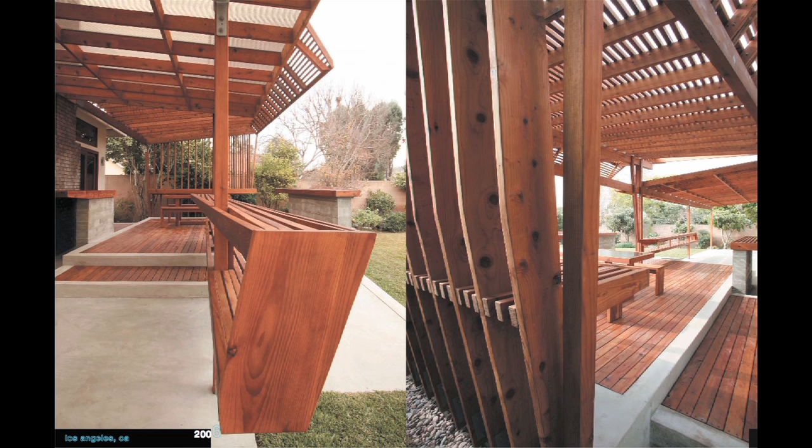And then, of course, the second project is, you always do something for your parents. So the second project is an outdoor deck we did for my parents. This project was the first time we had a couple of SCI-Arc interns over the summer, and we built the thing over the course of the summer and completed it. Which led to this idea that, wow, we can actually make projects happen in a period of 4 months. So ever since, about 5 years ago, every single summer we've embarked on an installation project, sometimes even 2, at the beginning or the end of the summer. And we've had mostly SCI-Arc interns help us in the construction of them.

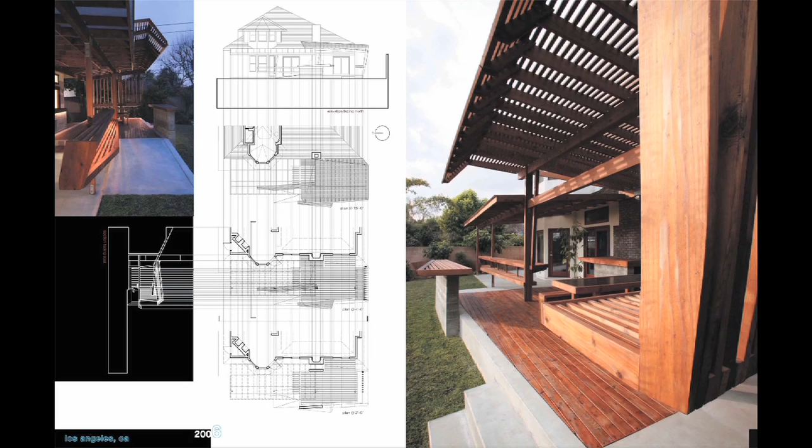So we thought it was important just to show those first couple of projects, to show you how we began in LA. Immediately after this, the work took a pretty dramatic turn, but understanding how the work played out over that period of time seemed important to us.

As Paul mentioned, the idea of line work is something we've been really intensely studying for many years now, and we even went back and pulled out a couple of our own projects for the lecture. A work of mine from about '94 on the right, Jenny's thesis from the GSD on the left. Jenny had always been interested in ideas of line related to infrastructure and program. And so her thesis had to do with an idea of wrapping program around these infrastructural pieces and the kind of spatial and organizational implications of that.

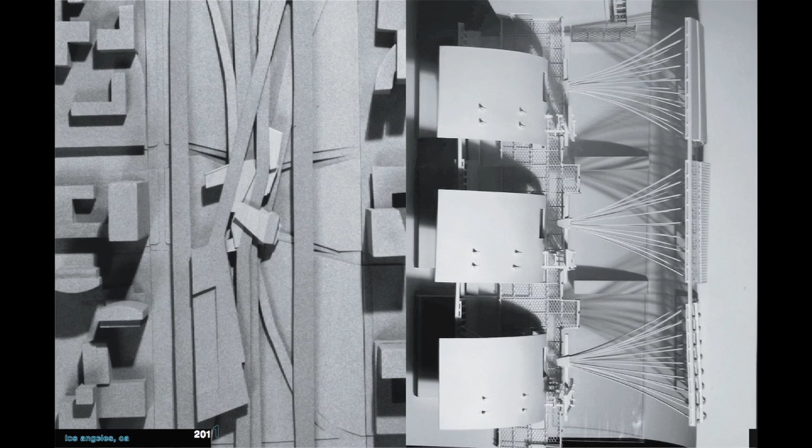My project on the right was about the interplay of light on these complex structural elements and immersing yourself into that space. The type of line that we're interested in has never been a graphic idea. If you look back at both of those, these seem like relatively two-dimensional pieces, but when you get down into them, it was really about creating spaces that could be experienced and, as I said, that you could be immersed into.

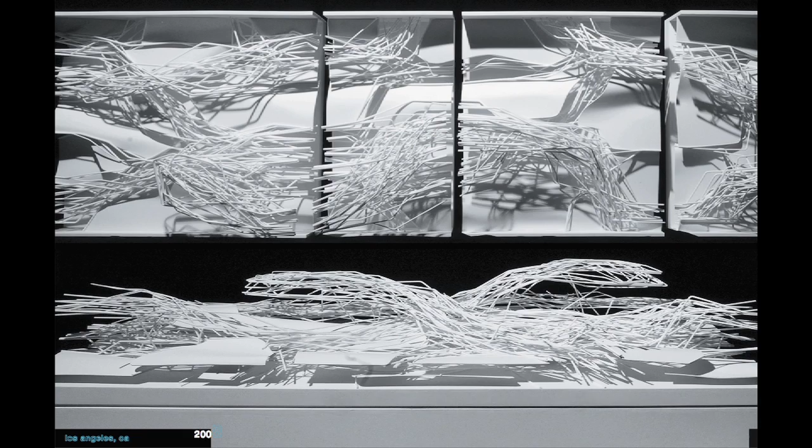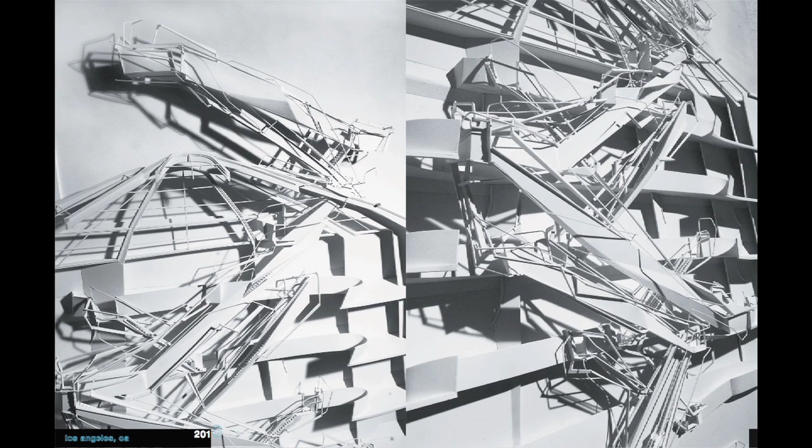We've always been interested in very dense buildup of lines, and in particular the idea that this kind of buildup had the ability to create nuanced spatial enclosure, so that while experiencing it, your experience oscillates between something that forms enclosure, immediately in front of you, and something that in an instant flows back into spaces or multiple spaces. This is a project we did for the Guggenheim, for the show Contemplating the Void. They had actually asked us to do a two-dimensional drawing, and so we decided to give them a 2-inch two-dimensional model.

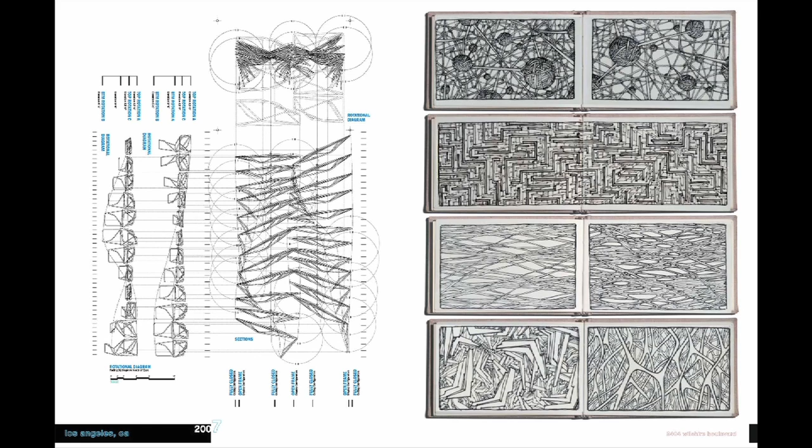The types of drawings that we've done over the years have also dealt with this idea of lines in a couple of different types of studies. On the right, sketches done over long periods of time related to no particular project, but really meant as a way of expanding spatial comprehension in the drawing. We've found that the more these have been produced, the more we could predict how to draw them better. The earlier ones were relatively simple, and now I'm able to further anticipate what will happen in the drawing compared to previous years. The drawings on the left are meant to capture the technical aspects of the projects, but also to convey a sense of the spirit, in this case, a project that moved, which we'll go into a bit later.

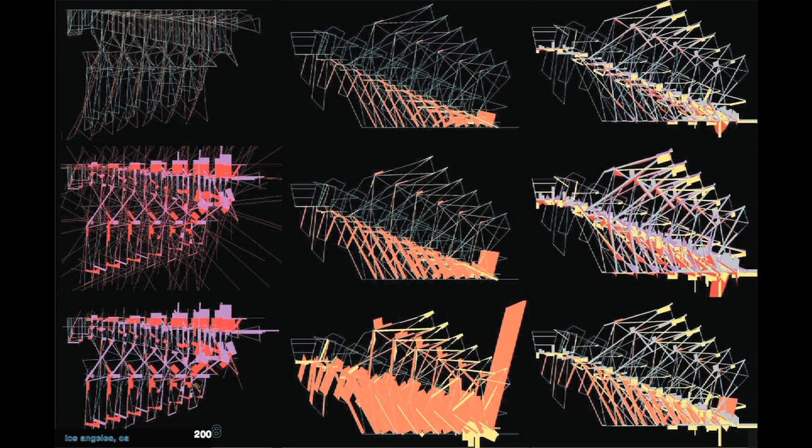We've always been interested in line work as a structural element, in particular because we have always believed that part of what enriched the experience is the idea that you could prolong the experience by creating work that you encounter without completely understanding it. It's never understood as an instant gesture, but it takes time to understand. On one hand, you know that it's doing something structurally, but it's a relatively inefficient system. The goal has never been to do it from an engineering standpoint, but to create something that's clearly working, but forces you to engage it in order to understand how it works. So you have to trace lines across space, understand their connectivity, and we believe that's enriched the experience.

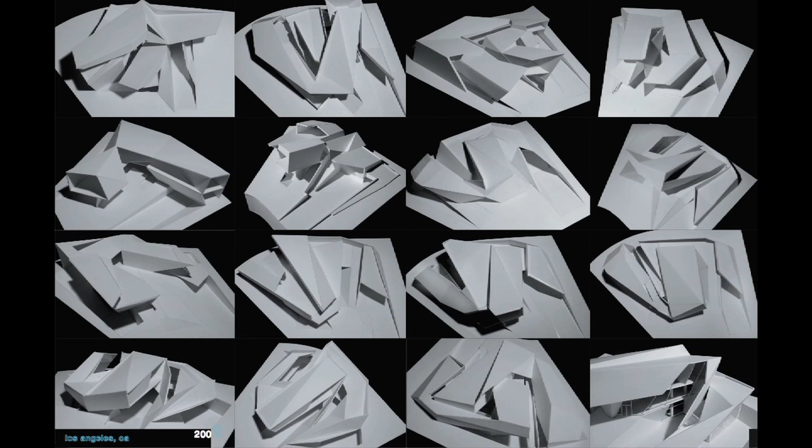So, one, we build tons and tons of models. We average in the 20s for each project. This is a structural model we did for the Muhammad Ali project, which we will talk about later. And then we also work digitally. While the physical model was great for understanding gravity and even structurally how it would work and operate, the digital model gives us the computational power to create the type of variations we can't do in the physical model, and also the precision we couldn't get either. And so with this, we were able to really create variations on something with very slight parameters.

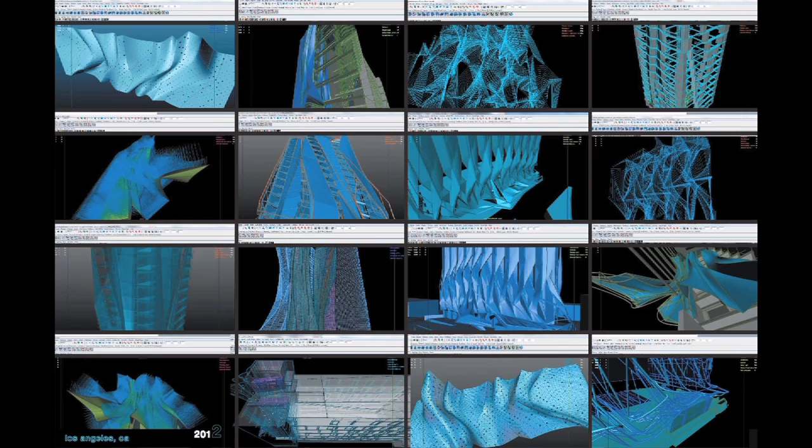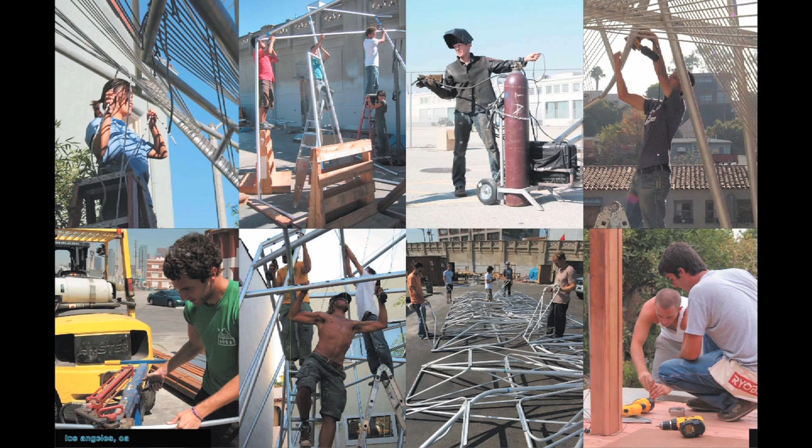The further step we take is that we really believe in actually building the work, prototyping, and understanding that design doesn't stop at construction documents but pushes into the whole fabrication process. We'd oftentimes literally design a detail and implement it the next day.

These are students from SCI-Arc who have worked with us, along with some volunteers as well. And we went into the projects...

We never went to LA thinking we would build anything. We didn't have any particular skills in building, although we're handy. We had never welded or anything like that. We just found that it allowed us to extend the process much further than we had been before.

Like she said, there are often times where the thing is 99% built, and we go back and build a model on the last day to finish a piece we're kind of rethinking.

Other than the wood construction we did in the first two projects, everything we've done since then is learning through the making. We'd never welded, never even used metal before, we didn't know how to do it.

Beginning around 2005, we started a series of projects, and we're going to talk at length about two of them, but we wanted to show briefly all four. In many ways they're addressing similar problems, and we wanted to say something about why we kept doing this.

We got out of school with almost a sense of moral obligation that each new project should come with a brand new idea. The more we did those projects, the more we found we weren't making any real progress, that we would just scratch the surface of an idea.

We were left with many more things we wanted to study. With each project, our sense of moral obligation changed from feeling we shouldn't repeat ourselves to feeling we absolutely had to, so the work could grow—not just through material expertise like a contractor develops, but through learning what the work could do in terms of its experiential effects. We'd learn technical aspects that would influence the actual outcome of the work from a design standpoint, not a technical one.

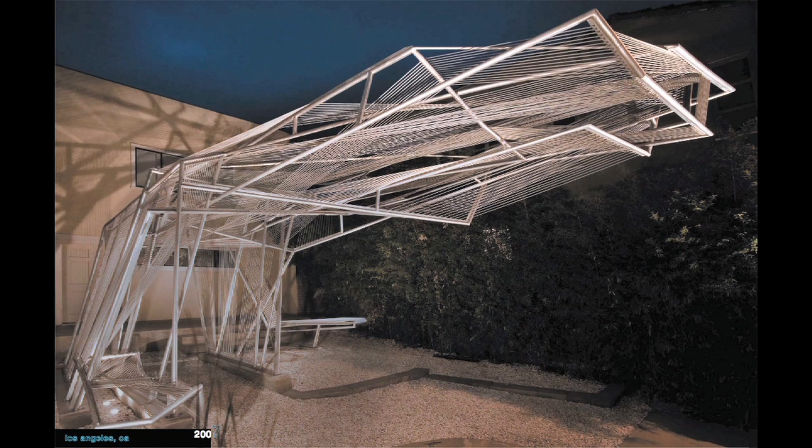The first of these projects was called Density Fields at Materials and Applications, an outdoor gallery in Silver Lake, Los Angeles. This was a kind of structural experiment—we created a 23-foot cantilever.

The second was a competition we won for the LA Forum for Architecture and Urban Design. It was a shared space—the competition called for a piece meant to be put in a closet the majority of the time, since it was shared. Our response was simply that it didn't make sense to create something of real architectural value and put it in a closet most of the time.

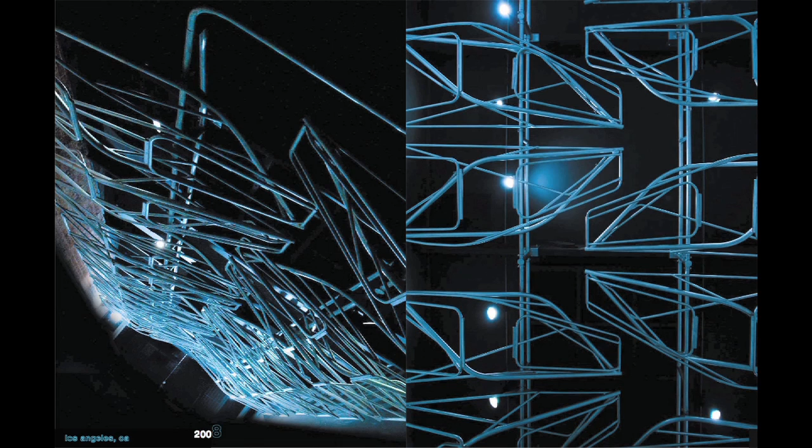So we designed a piece that functionally operated as a series of exhibition hangers, but could be tucked up into the ceiling and serve just as a ceiling plane. On the right you get the modular reading of the individual pieces, while on the left it becomes this field of complex aluminum tubing.

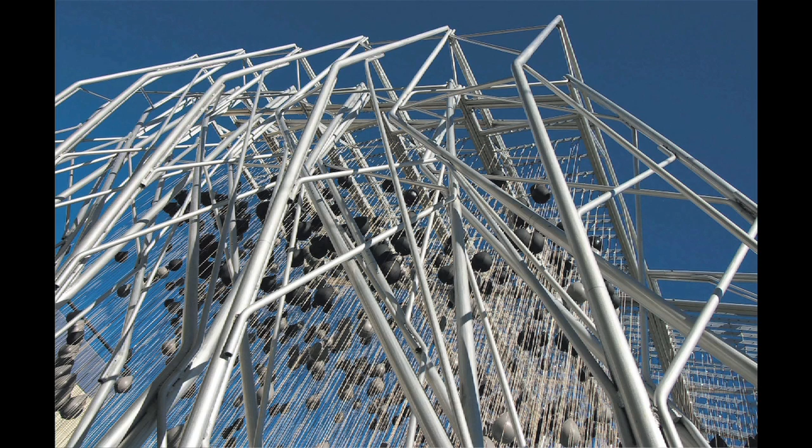The third project was in the SCI-Arc gallery, called Live Wire, which we'll go into more. The final one was called Realize, a tribute piece to Muhammad Ali, which we'll also cover.

That third project was called Live Wire. Most of you probably know SCI-Arc hosts gallery installations three or four times a year. At the time we did it, there had been about 30 installations in the gallery—shocking to us that there had been that many—and many of them were absolutely fantastic.

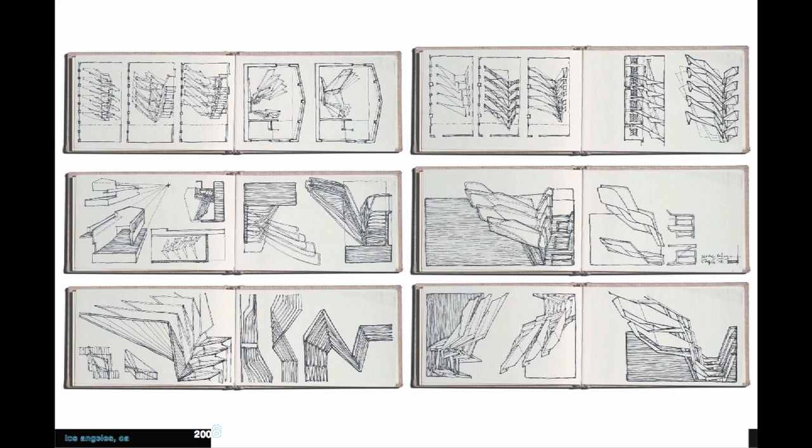But one thing about the space that struck us as interesting, something no one had addressed yet, is that—if you know the space—there's a catwalk visible up to the right, and a series of clerestory windows to the left. Very early on, we decided we wanted to make a stair that would allow you to move from the gallery up to the catwalk above.

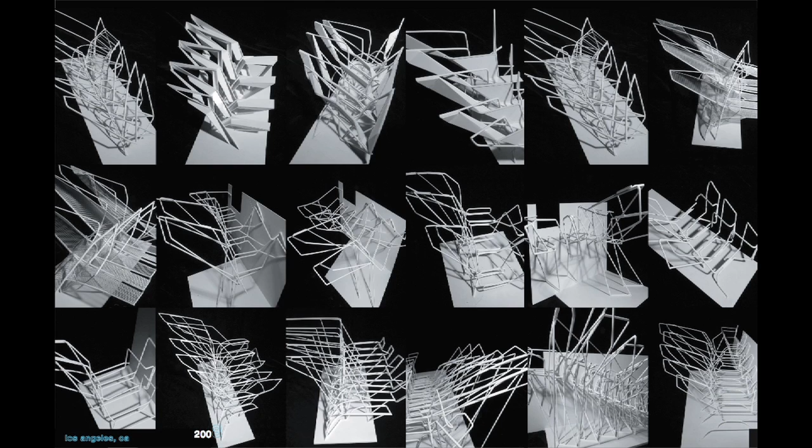And we started looking at the problem, continuing this idea of line. Something that we knew had to be added to this project was the idea of surface, because it obviously had to function as a stair. It was a complex problem of trying to weave in both the line work as well as planar elements.

When we did density fields, this was the technique we used—the first project, the big cantilevered piece. For every joint, we were taking aluminum, chopping it at the joint, grinding them down, re-welding them, grinding again, and then sanding them. There were roughly 100 joints. It was kind of crazy.

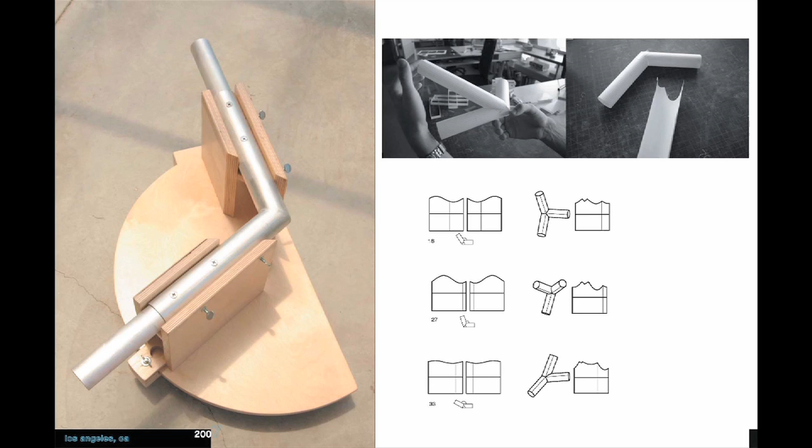In the second project, what you're seeing is an adjustable jig that would allow us to make all of the joints. On the right is an unrolled Rhino file that we could cut out on paper. We would wrap it around the tube, trace the cut, and then cut it with an angle grinder.

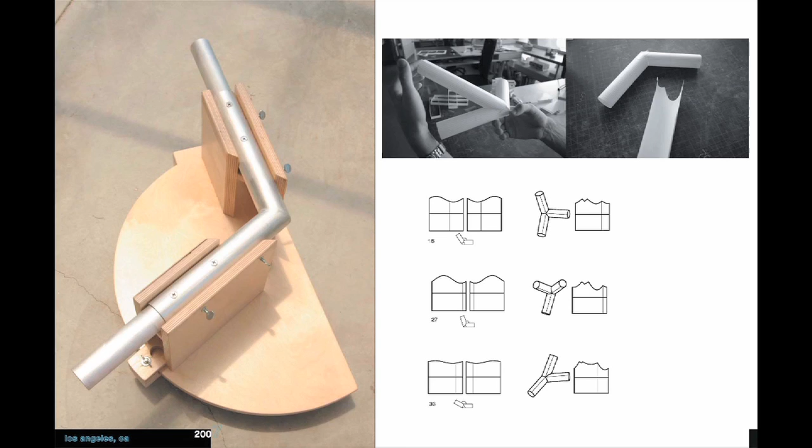Well, the next proposal for the pendulum plane, the ceiling piece, was so incredibly complex that we realized the only way we were going to accomplish this was to come up with a different technique. And so we went to bending.

A very inexpensive rotary draw bender would allow us to bend 1-inch and 2-inch tubing for the dies that we had. Aside from the technical aspects of this, it allowed us to make much more complex pieces, but it also really changed the reading of the work.

Suddenly, the idea that we could make a complex field that read as a field, as opposed to a series of trajectories, was a totally different reading, and it completely changed all of the work that followed that.

Because it was done for the SCI-Arc gallery, we had a lot of students who would come in and say, I've got an hour, what do I do? And we needed to come up with systems to think about this strategically and organizationally so that a student could walk up and you could direct them to work on the piece.

So the piece was broken down into a series of loops. The idea of the loops was both a conceptual problem and an organizational problem. On one hand, it was about identifying—you go work on this loop. On the other hand, the idea of the loop had to do with the overarching concept of the project.

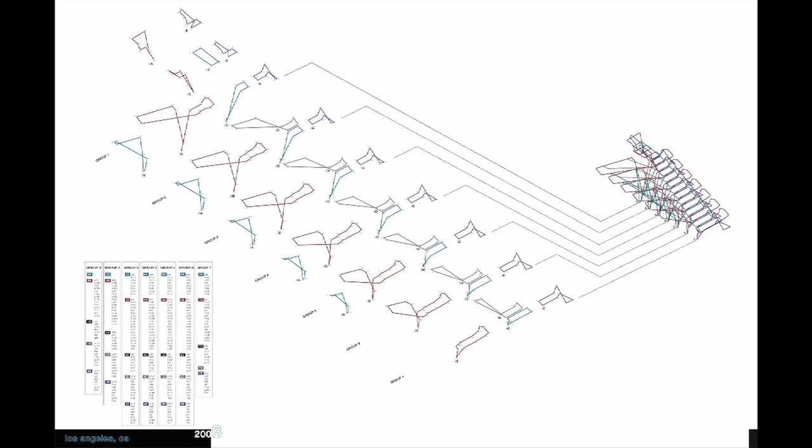So if someone comes to work on it, you go to that image first, you direct them, and then they'd come to this sheet where they could find a stick of aluminum—here's where you bend it, this is what the bend needs to be, here are the lengths, etc.

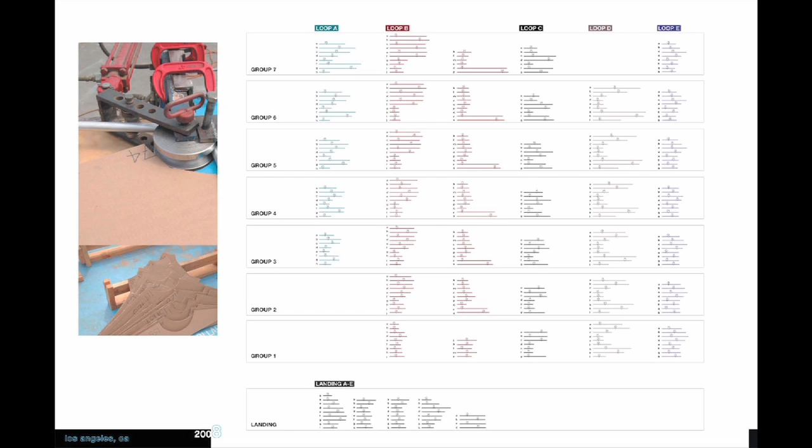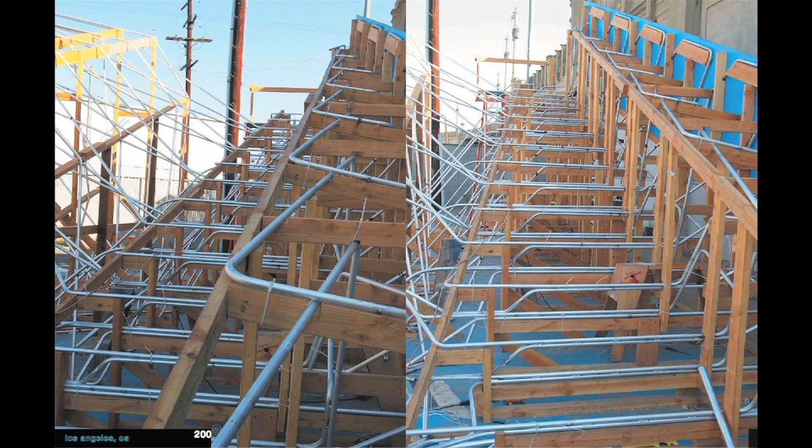All of the projects involved making really elaborate wood jigs that were first built in a digital program and then constructed on site. The reason for the jigs was simply to ensure that the piece came out right.

The way these three-dimensional loops worked—we would love to have a CNC bender that just made all of those for us. We didn't have that. We would make them one bend at a time. So for any loop, you might have 20 bends along that tube.

For each one, we'd make one piece that was straight-line bent. Then you'd take the next piece and connect it, rotating that piece using a telescoping connector until you got the right geometry. You'd then place that in the jig, and it would ensure that the overall geometry would be right.

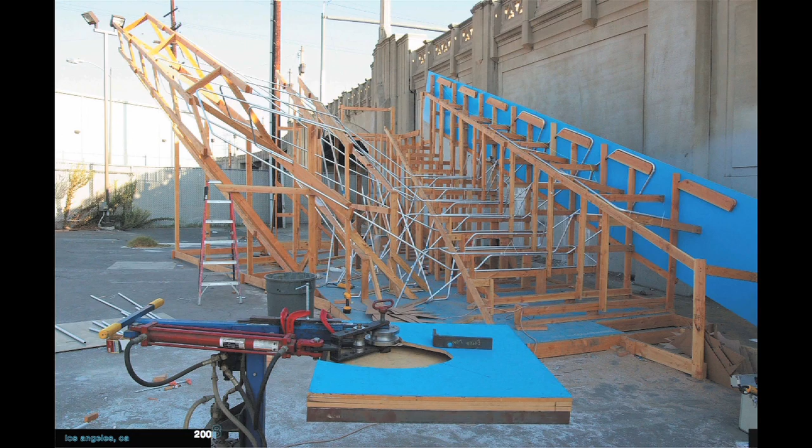We only had about a week and a half in the actual gallery, so the piece was first constructed in the parking lot. The entire jig pieces were welded together when they could be, still allowing them to get through the door. We then took the entire jig apart, took it into the gallery, and reassembled the whole thing.

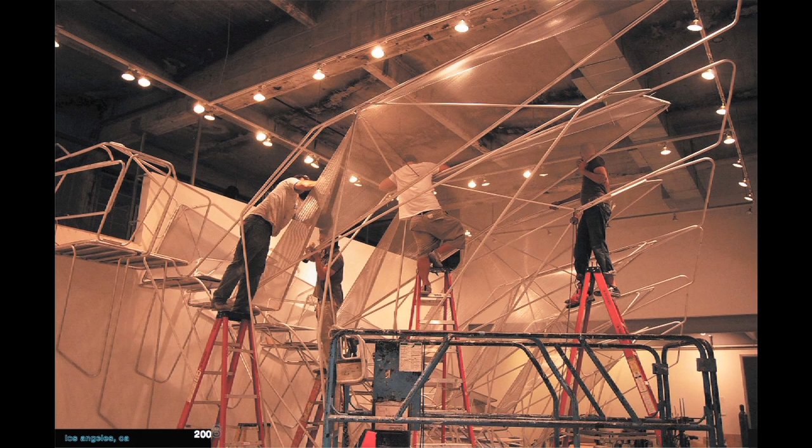We started welding all of the units together, and then the jig was slowly cut out one stick at a time, allowing us to test the structural integrity of the piece as we went.

And then this is the piece where we actually start to put in the infill perforated aluminum panels. Here you get a sense of the loop I was talking about. On top, a really elaborate piece, with 20 to 25 different sticks of aluminum assembled together.

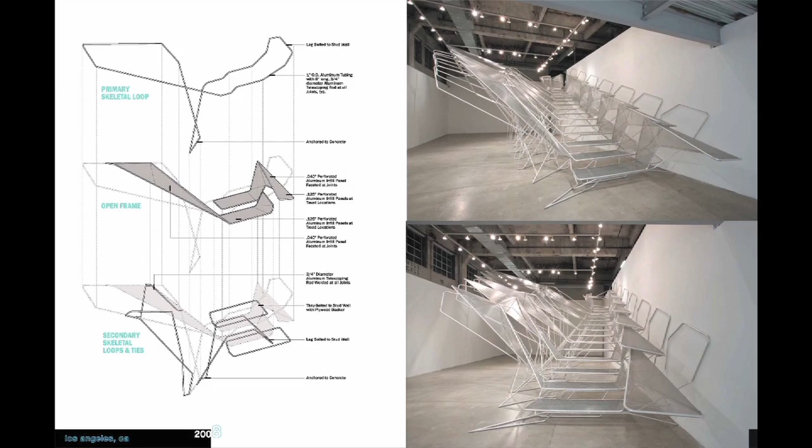In the middle, you see what was really the hardest design problem of all: the panels needed to be captured within a piece of aluminum tubing. So the tube had to go up, come back down, and eventually completely wrap the piece, which was both a conceptual and a technical problem. Hence the 20 to 25 models working on that same issue. Talking about this structurally was kind of an amazing challenge.

When we proposed to our really excellent engineers at Buro Happold that we wanted to build a functioning stair out of 1-inch aluminum tubing, they thought we were crazy. They thought it should be at least in the 2 to 4 inch range. So we convinced them that instead of using larger members, we could layer more 1-inch aluminum tubes to achieve the strength of the larger members.

What was then developed was a system of creating ties that break up the larger spans, as well as reinforcing the stiffness of the tube. At the same time, this is definitely not something engineers are comfortable with. The stair is really soft, so when you walk on it, it's super bouncy.

That was thoroughly tested at the opening. Over the 2-month period, we would get comments where students said, 'Oh, I took the stair today' — they would bypass the normal stair and take our stair to get down. And so here you can see the aluminum panels.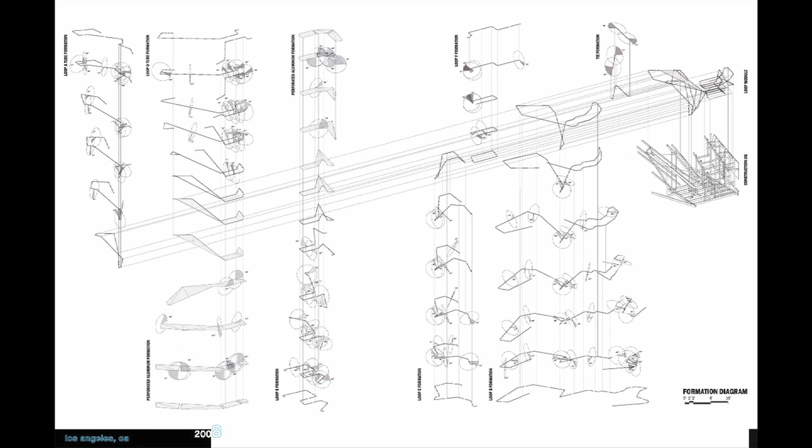I've probably beaten this like a dead horse, but in the upper left, you see how those pieces were assembled. They were all laid flat on the ground as single bent pieces, and then rotated into place, continuing to rotate as you move down. I don't have a pointer — can that point on that?

So there they are laying flat on the ground, each getting rotated until you get that shape. Then you come across, and in certain cases, the tube element is combined with the planar element. Those were eventually put in the jig. This diagram is just showing you one component, and there were 6 or 7 of them.

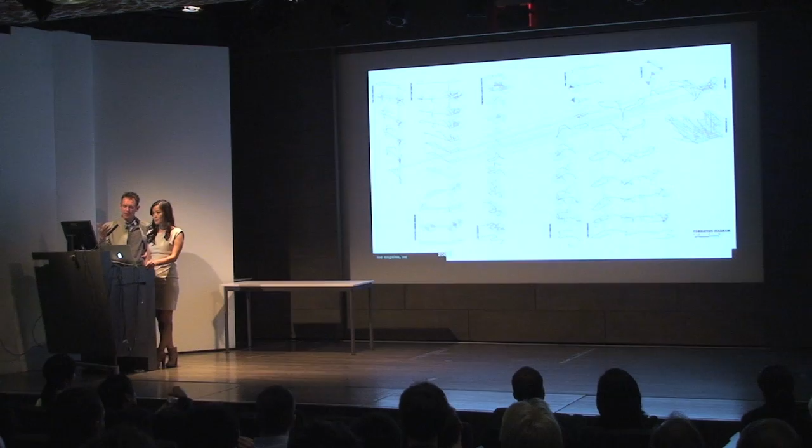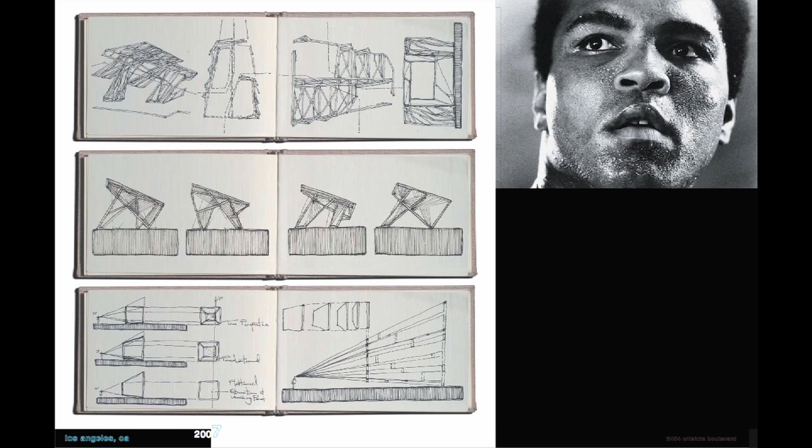So, this is what we call the provisional end to the aluminum tubing project, at least at this scale. This was done last year at LA Live, which is a space right across the street from Staples Center where the Lakers play — definitely a very different kind of venue than we're used to.

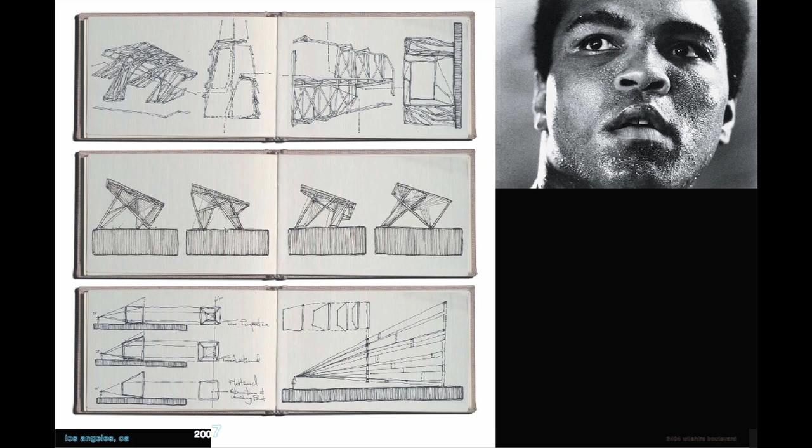We were approached by an artist named Michael Kalish, who does a lot of portraits for celebrities and icons. He had an idea about doing a tribute piece for Muhammad Ali — mainly how to create the face of Muhammad Ali through the use of punching bags. What he didn't understand was how, technically, in terms of perspective, to pull that off, and also how much the punching bags would weigh and how to structurally hold all of these things together.

So a little bit about this: this is the overall structure, and this was, at that point, the biggest structure we had done. It was over 2 stories tall, and it had to be done as a modular system, which really is a very difficult thing if you want all the pieces to feel integral to each other. So there was a very complex way of actually nesting one module with the other module.

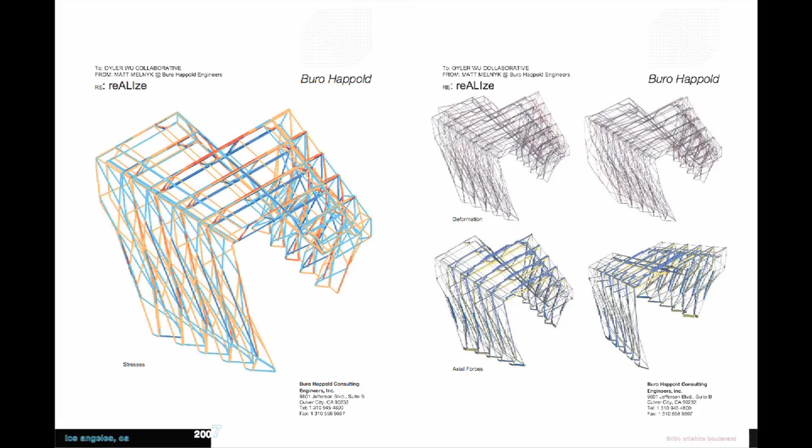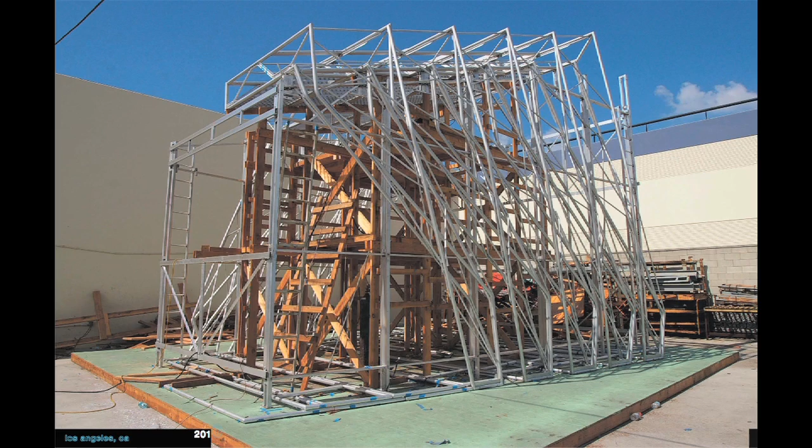And now, we built a really giant jig for our structure. It consists of mainly 2-inch aluminum tubing as well as 1-inch ties. In many ways, one of the big aspects of this one is we'd never been asked to create something that was modular before. And if you look at the work, it doesn't want to be made modular. In order to get that dynamic sense of movement, you've really got to get tubes nested within one another.

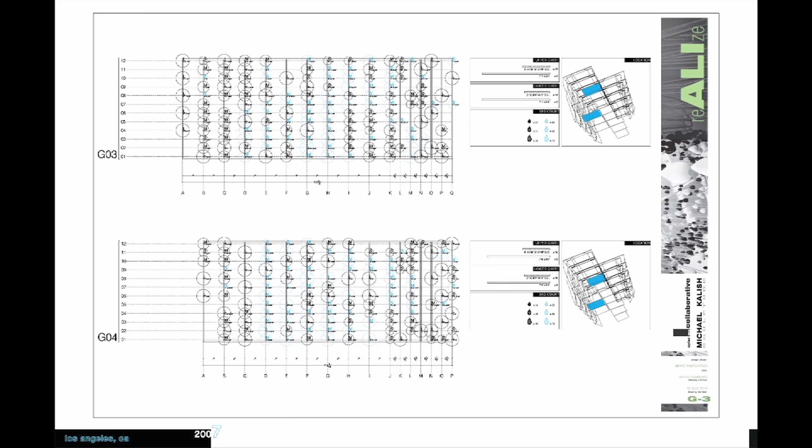And so there was a very elaborate system of trying to nest it inside of itself with each of the legs, but still allow it to go back together through a very quick process. So this is more fabrication drawings. We use Grasshopper to organize all of our lengths. We had over 1,300 punching bags at various heights, 3 different types, small, medium, large, and 2 different colors.

So, as you can see a little bit here, the punching bags are suspended. They're suspended, but they're actually stretched on both ends from the frame above and below. With this project, the big question for us is what is our role as architects? There was an artist already along. He had a pretty clear idea to begin with about what the face could be.

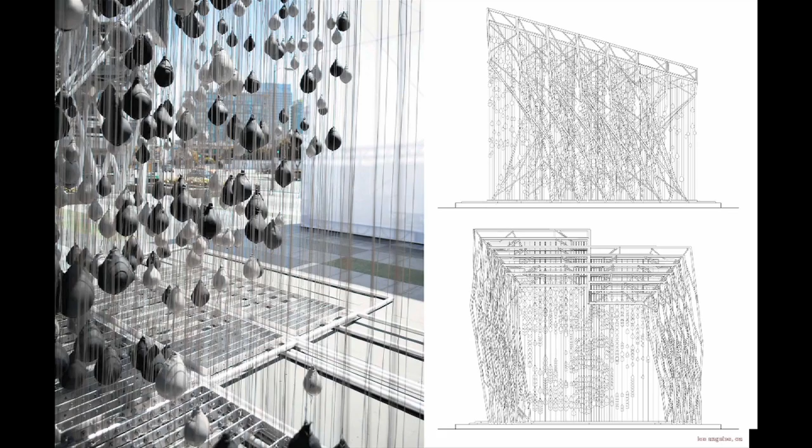And what we always said in the office was that we needed to create a piece that people would go to and absolutely appreciate as a piece of art or architecture before they ever knew that they were there to see a face. And so it was very much about people walking around the piece, being intrigued by the dynamic sense of movement, seeing that complex field of bags and the sparkle of the stainless steel cables, and then eventually arriving at the face and understanding that that was what brought it all together. Here you see the face just starting to come into view. And finally, Muhammad Ali.

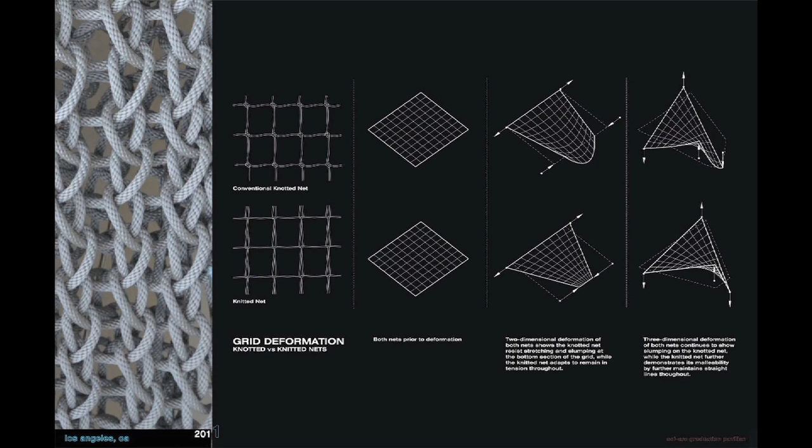And we quickly realized that most nets that you purchase are knotted nets, not knitted nets. And what that means is that every intersection is knotted, and the piece isn't malleable. You couldn't take a square and bend it into random shapes three-dimensionally. You'd get things floating around, and you lost control of it. But the knitted net was completely malleable, and so it allowed us to make different sorts of shapes, and the nets would adjust to it.

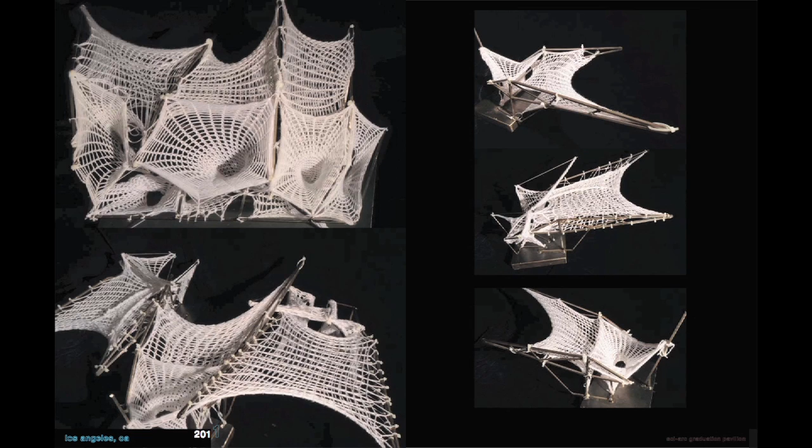But we didn't know how to knit, so. Yeah, so we watched YouTube. We immediately started watching old women knitting things. And we began knitting. We knitted yarn and string and started making models out of it

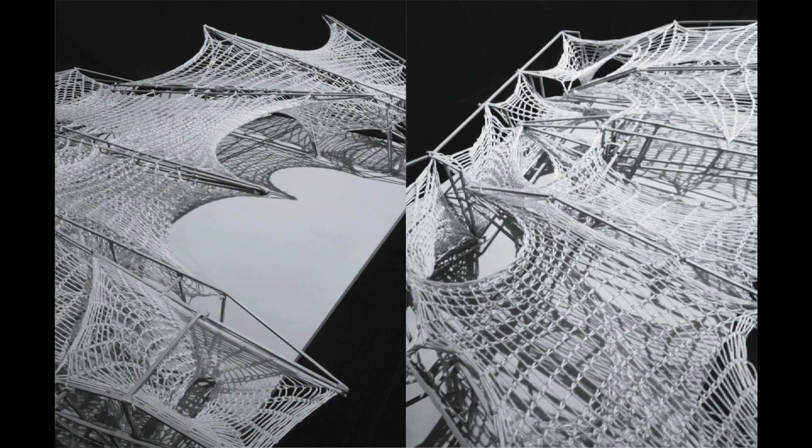in different configurations. And most of the work for this project was done through large physical models because it was the one thing that would tell us how the natural behavior would occur. The scalloping, for example, of the front of the nets as it folded over. And in many cases, we had multiple nets that were tied to one another, so you get strange behaviors acting in many different directions.

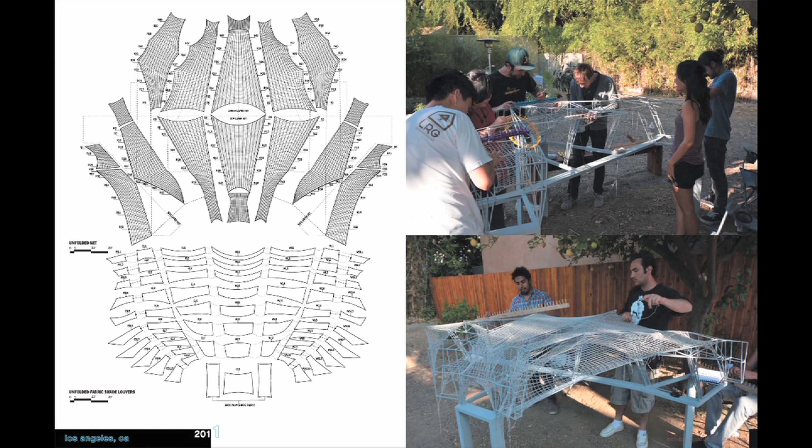So our students wouldn't admit to this, but they were kind of embarrassed to be knitting in studio. But this is in our backyard. We start building this really giant model where they also knitted the nets.

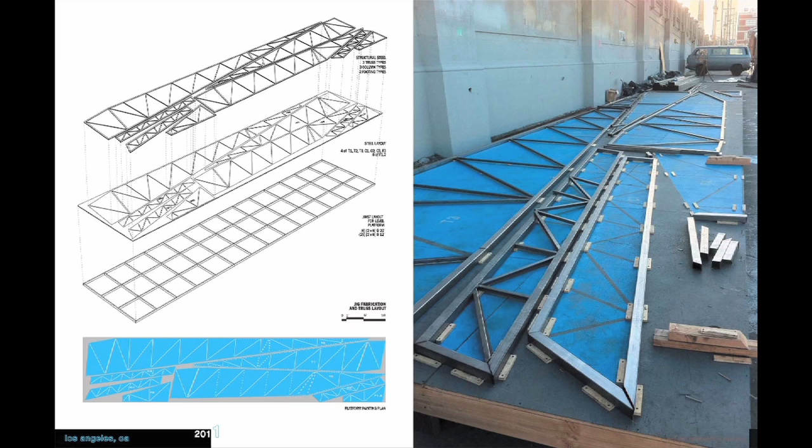For the structural elements of the piece, we also had to think more efficiently about this one. So rather than the elaborate jigs that were created for the previous projects, all of this was done on a flat surface. And then we reduced the project to 3 big trusses and 3 different types of columns, but all of them were doubled up. So you'd build them flat, you'd then three-dimensionalize them and weld them in the transverse direction.

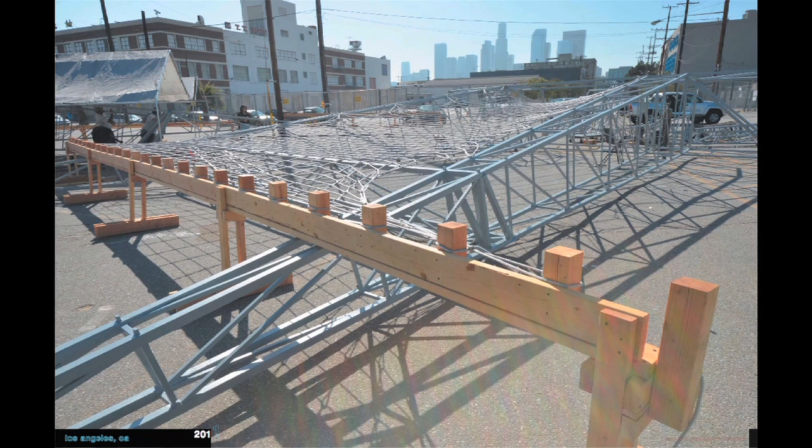The knitting was actually done using 40-foot-long 2x4 jigs. We did a fair amount of experimentation with the jigs, looking at the spacing that was required in order to create the distance that would ultimately be needed. All of the work was done, as much as possible, on the ground. So you've got the roof element of the major component of the piece being laid on the ground, three-dimensionalized as much as possible, and then the net knitted across it.

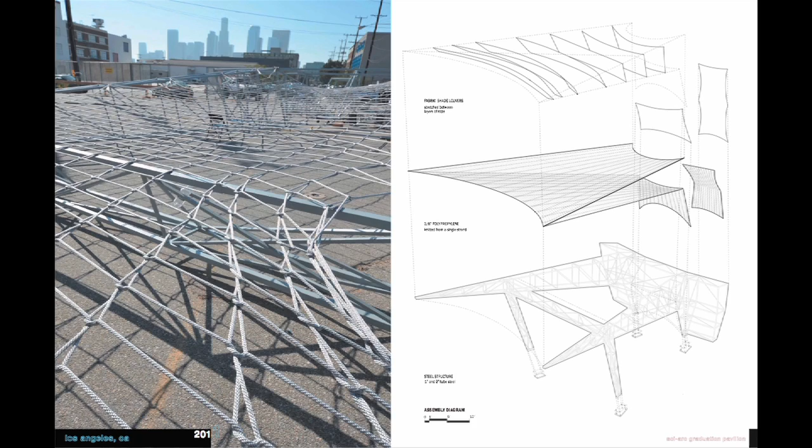And then eventually, when we get to the end, knit it out into the parking lot. And then raised, so that when the piece got raised, the net could fold over to the underside. So you can see on the right, that's how the net actually, each bay is actually one piece of rope that wraps all the way around from the top to the bottom.

And we didn't have an elaborate budget for this. We didn't have a crane. We had a rented forklift for a couple of days, and we had a half-working forklift that SCI-Arc owns. So rather than craning the pieces into space, we had to think about how to tilt them up, back end, and then the front end running between forklifts, inching it up a foot at a time and eventually putting the columns in place.

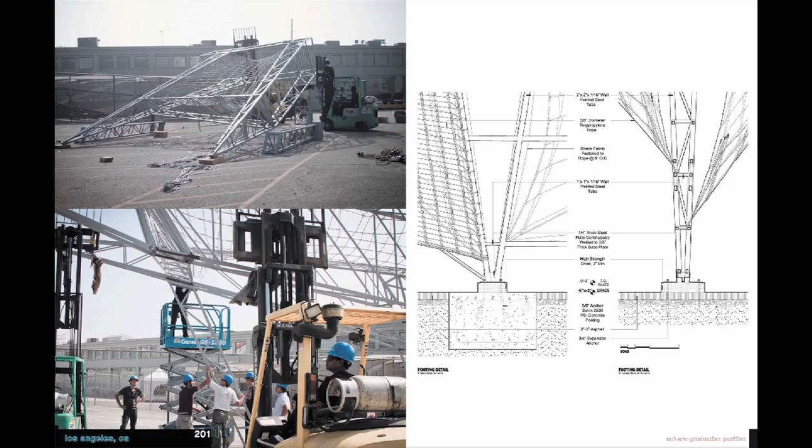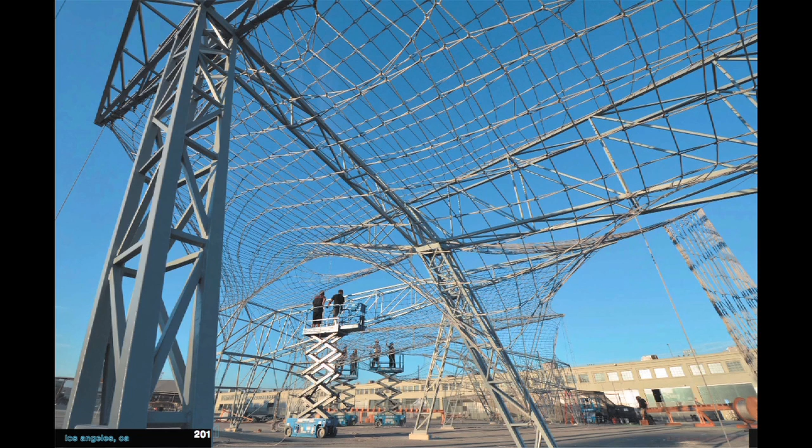So in this image, and I think the next one, you're just starting to see on the far right there that half of the net has been attached to the structure, and half of it is still hanging to the ground. Actually, it's kind of an interesting story, because when we were at this point, we thought, what if we totally ruin it with the fabric? Because we were kind of falling in love with the whole nets. But then we put it in.

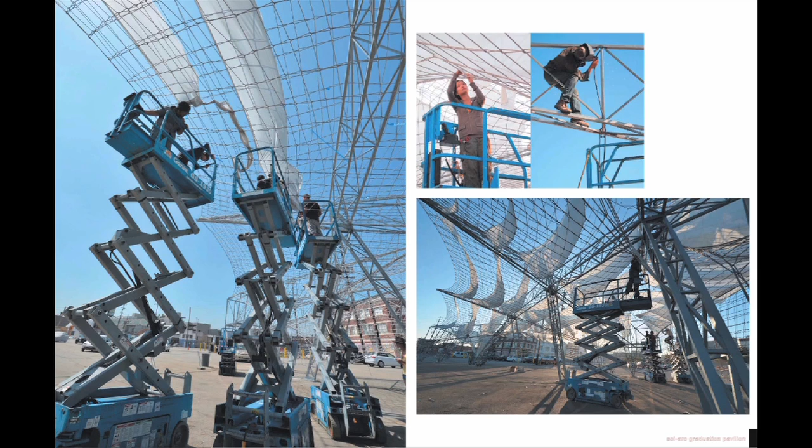And at this point, we're out in the parking lot with the enormous model placed in the right orientation, calculating the shading that we were getting. And we had done a lot of studies in different digital programs, some that accounted for daylight savings and some that didn't. And so we were never 100% sure that we had gotten it right. So we literally were working on that model up to the time that we put the final louver in place. So this is the final piece.

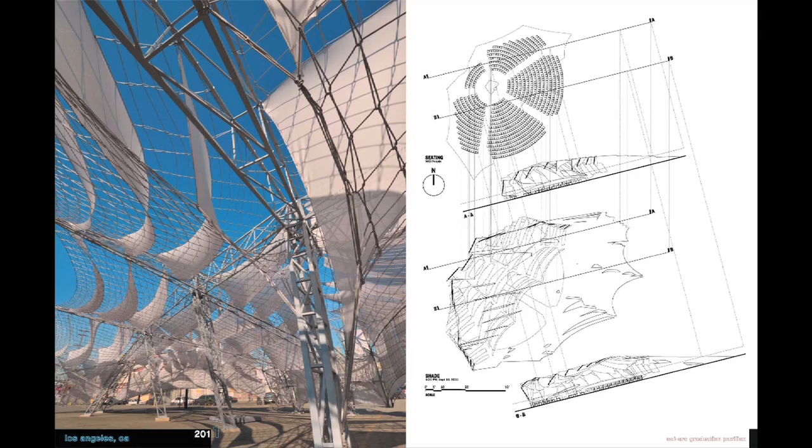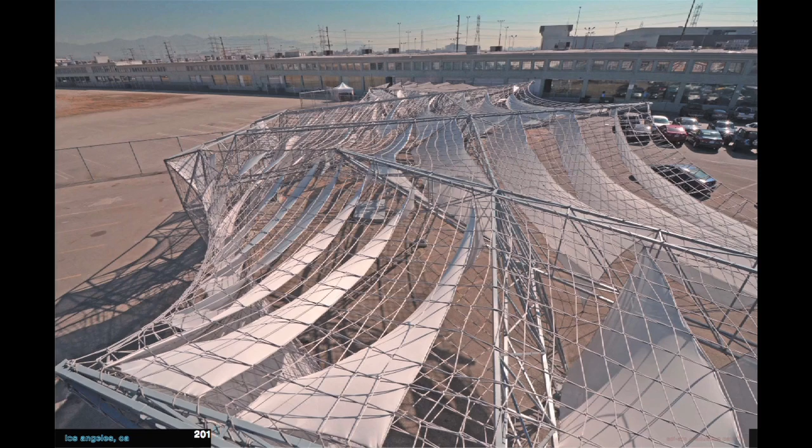So here you really get a sense of the natural behavior of the net, even within the field. So the pieces are looking like they're almost blowing in the wind, but they're really just taking on the natural curvature of the net on the upper layer and the bottom layer.

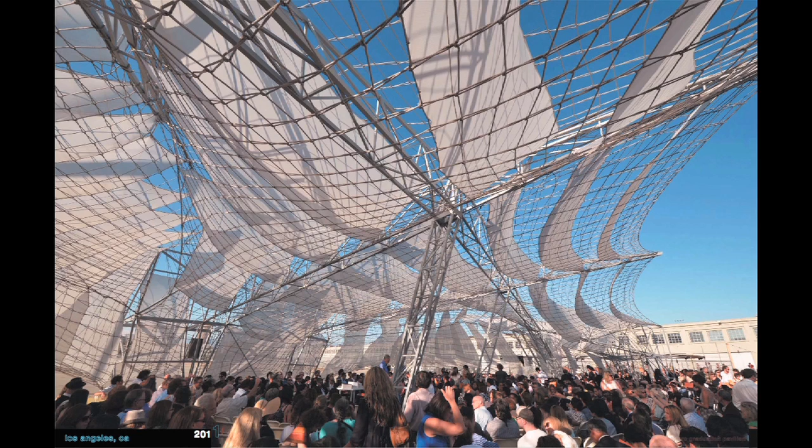So this was at the actual event, which was the graduation for SCI-Arc. And no one complained about sun in their eyes. We were very happy.

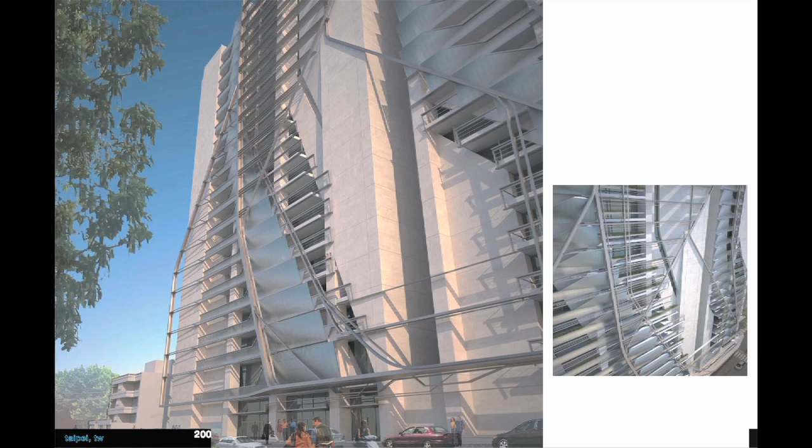So this is sort of the last part that we're going to talk about quickly, which is transitions. Really about what's next for us and what else have we been doing other than the installations. About, I would say, 4 to 5 years ago, simultaneous to all of our installation projects, we have actually been doing really large projects in Asia.

And the first, I would say, three years, while we did many proposals, we actually didn't get any real projects. But in some ways, we feel like it was a blessing in disguise because, at that point, we'd only done these really small projects, and to jump scale to a 16-story tower, we really didn't know how we would jump scales. And so, of course, our initial projects, while they have the ideas that we're interested in, were literally taking our lines and blowing them up bigger. That is more or less what we were trying to do. But

I think also working in Asia, we were under the kind of strict requirement that we can only work with the first 5 feet of space and not touch the floor plan in any sort of way. So that was also a big challenge. How do you create any layer, space, create any variation, and do something great within 5 feet of space?

So in retrospect, we look back at these projects, and quite honestly, we're kind of critical of that approach we were taking at the time. On one hand, we only had so much space to work with. On the other hand, we gleaned a few interesting things from it, but in many cases we were finding that the scale of the pieces was wrong. It no longer operated structurally. It was applique of that idea. So we've been forced to rethink those ideas at different scales and fighting for greater depth.

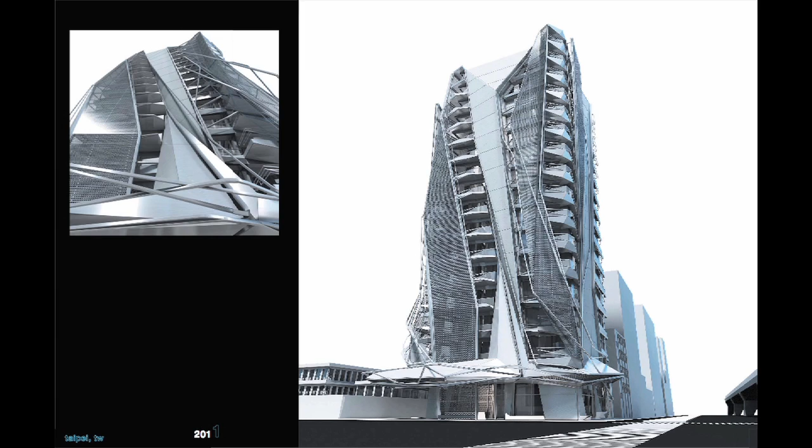And so this was a project we started last year, and we realized that we can't just pull large lines onto the face of a building, but it actually requires the play of both surfaces and lines. And all of these projects are actually housing, which means that you have very repetitive balconies that we had to deal with, and they couldn't be relocated. How do you deal with that, and how do you still create the variation that we were interested in?

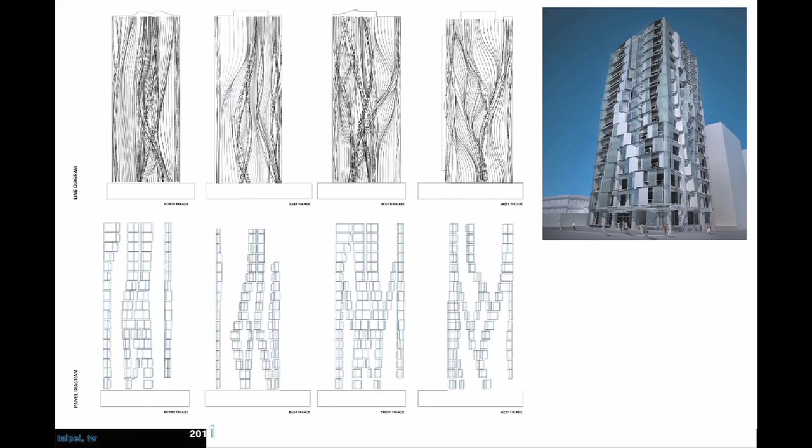So this is from the ground view up. You can see sort of the play of these panels. They're shifting incrementally to create variation and also depth as well. And moving to this kind of work wasn't at the insistence of the client. It was us really realizing that there was an appropriateness to the scale of this that worked better with the city, that worked better with the scale of residential development, but still was in keeping with the kind of dynamic sense of line movement that the previous projects had.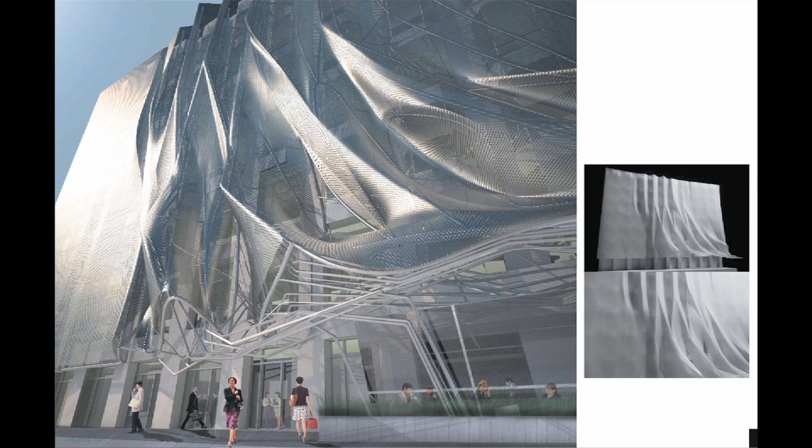And the final project we wanted to show really quickly is another project. We call it the high-res, low-rise. And this is also a skin project. We were working with the client IAC. You guys might know the building in New York. And we were given an existing 8-story 80s type building that we are creating a new identity for.

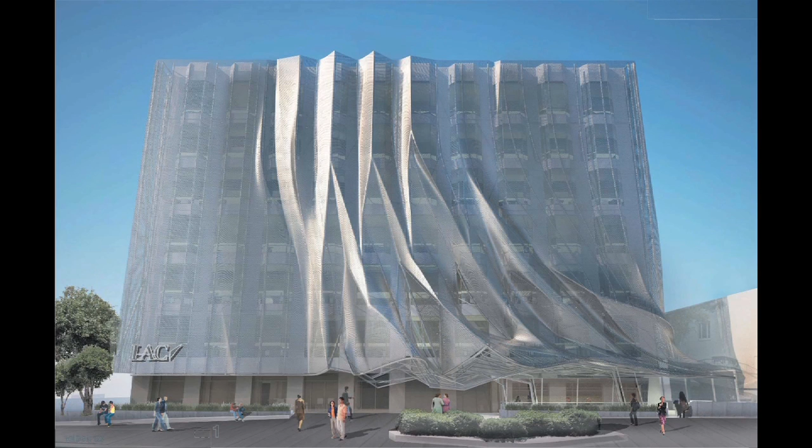And we were interested in using a screen material, so mostly surface, actually not a lot of lines. And through the rippling of the material, it actually flows down to the moment on the lower right, where the actual restaurant is. And zooming in, there's actually a layer of structure behind it as well. So, one last video before we finish.